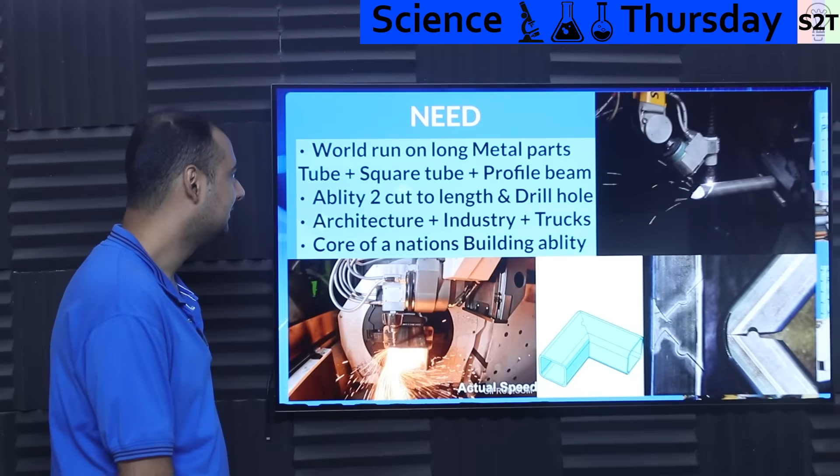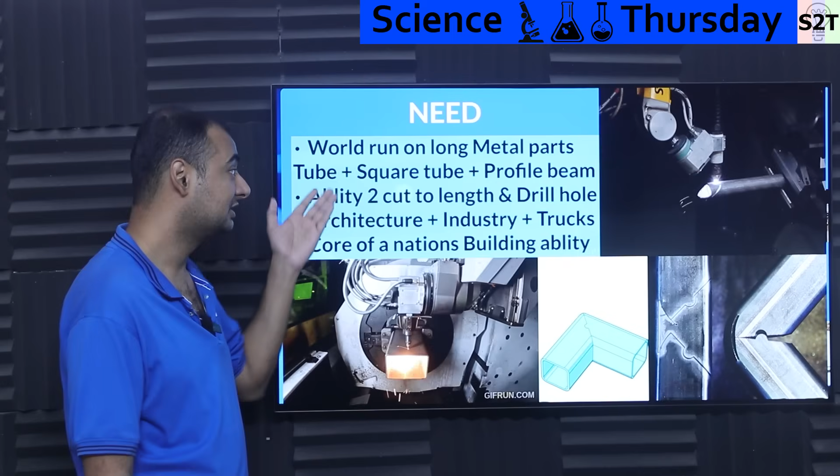First, you have to inherently understand the world runs on metal parts. That's a very basic thing to say, and it's truth. You want to understand the health of a country, figure out how much steel they are making annually. That's how important it is. So be it pipes, tubes, square tubes, profile beams, whatever have you, these things are the backbone of civilization that you and I take for granted, fundamentally.

You might be like, okay, what do we do with these things? These things are stock material. What do you do? Well, you cut them to length. Generally that's the first step. You take a very long one, you cut it to a small one.

Step one, step two, drill holes, a lot of them. For example, if you looked into Edison Motors, or the individual I interviewed about making a hybrid truck in India - trucks are big heavy trucks, I'm not talking pickup trucks, big heavy, basically backbone of the country trucks. They are generally giant metal C-beams and you have a lot of holes into that. So generally you have a long C-beam supply, then you cut them and then you drill them.

Drilling takes a lot of time. So fundamentally, and that's just the trucks part - half of the industrial section is just taking beams and cutting them to the required length, nothing more than that. You'd be shocked, if you have a machine that can do this, how much industrial clients you're gonna get. Just like, hey, we have this material, cut it at this price, go. Oh, of course, have a lot of drilling holes and all that. So like, shut up and take money.

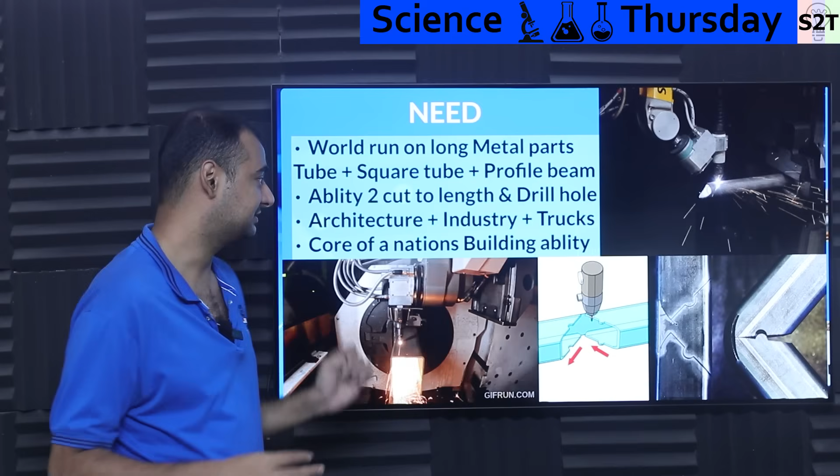So architecture, railings, staircase, way too many things to name. All of the world behind the scenes generally requires something like this, where you have the ability to cut a stock metal material and drill holes into them.

And here's the deal, this is core of a nation building ability. For example, I recently linked a very interesting video from Jerry Rig Everything. He wanted to make a solar roof, so to say, for Speed Week, where they can charge their battery bank and the battery bank will run the administrative assembly vans or something like that. In those sort of scenarios you needed a structure. How would that structure be made? Profile beams - you cut profile beams, you drill profile beams, you go home.

And America is learning that it's an unwise idea to have that sort of machine in China. So they're like, yeah, let's bring everything back to America. And again, he's got a wheelchair factory that literally runs on pipe laser cutting machines. So fundamentally, there are a lot of abilities you unlock if you can do this.

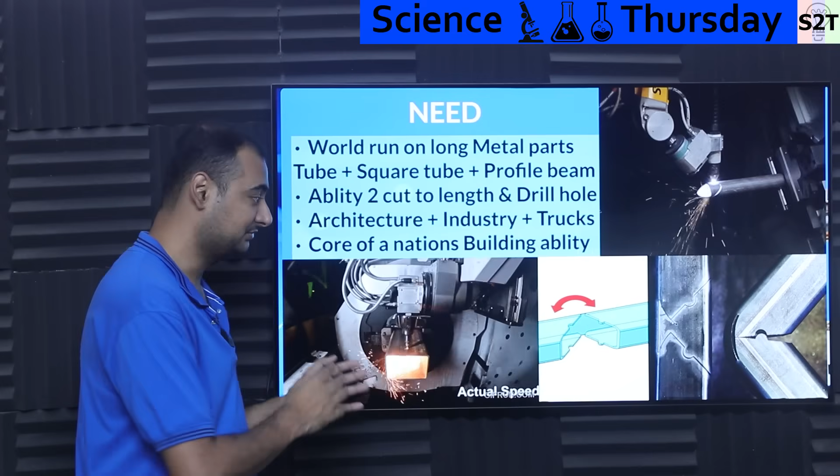Because now, do you need to have this? Yes and no. Can you do what this machine does manually? Of course you can do it manually. But here's the deal, money does not buy time, money only buys speed. For example, how quickly can your factory churn out a truck is directly proportional to how quickly you can do material processing. So if material processing is like 1 hour versus 1 to 5 days - because trust me, drilling on those big C-beams takes sweet time and a lot of sweat, blood and tears - that versus shui, go. So that's like night and day difference.

So fundamentally, it has the ability to build nations. You can do things that you may not think are important, but it's like shut up and take money.

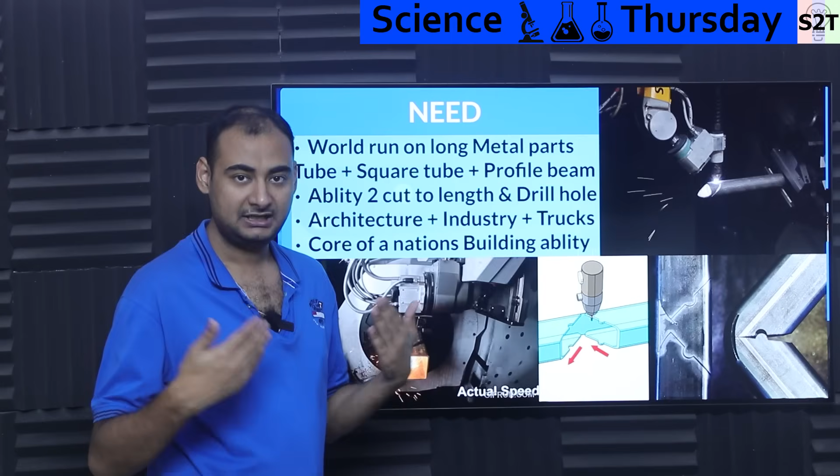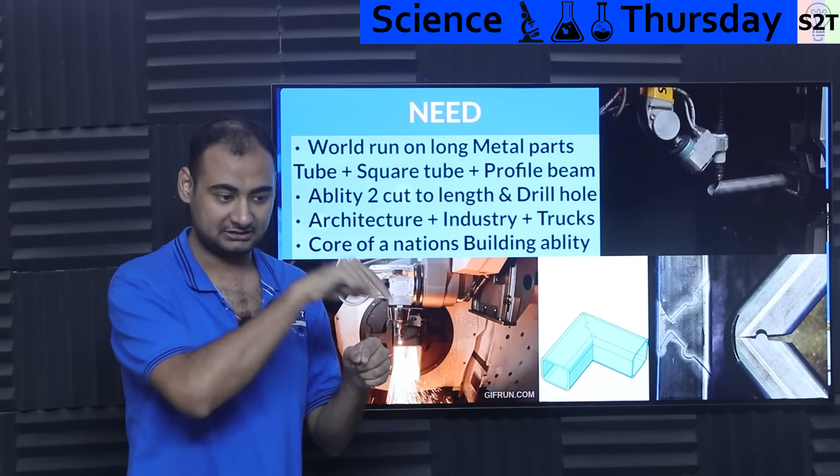For example, let's say you cut a pipe, and you want to give it a 90-degree bend. What do we do generally? We slice those puppies at a 45-degree angle and then you weld it. But again, you have basically two parts and you have to trust the welding is perfect. But here's the deal, if you have laser cutting, you reduce that system. Why? Because you can have a curve and then you have a perfectly fitting piece. So the 90-degree can be maintained far more reliably. Welding, the weld bead area goes down drastically. So trust-wise, you increase the trust while reducing the consumable item, so to say.

There are many things, like if you know what you are doing, you can do amazing things. If you want to make a roll cage, you need to cut a lot of notches. You can do it manually, but good luck. So there is a need for this.

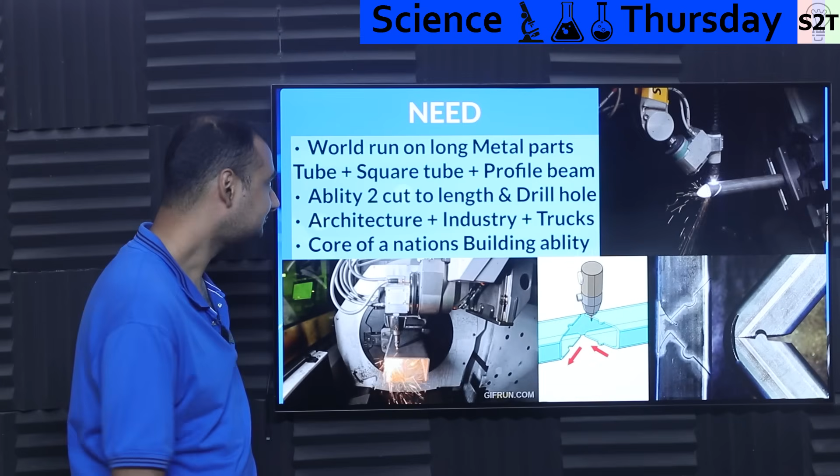This is not a luxury thing, this is like, nah, you need it. So how does this work?

Well, inherently it's just CNC with extra steps. For the cutting element, generally you have two options: laser and plasma. Let this be very clear, plasma you will rarely see, but it is there as an option if you are low on funds.

Plasma is cheap, so then why don't people use it? Plasma gives a very messy edge, so you have to do grinding work after you've cut it. It may be okay, but many times people think, if I'm spending that kind of money and still have to do manual grinding just for cleaning, wouldn't it be better to just pay a little bit extra and go to laser where that step is removed? So plasma is more of a DIY, edge niche case, it makes sense there.

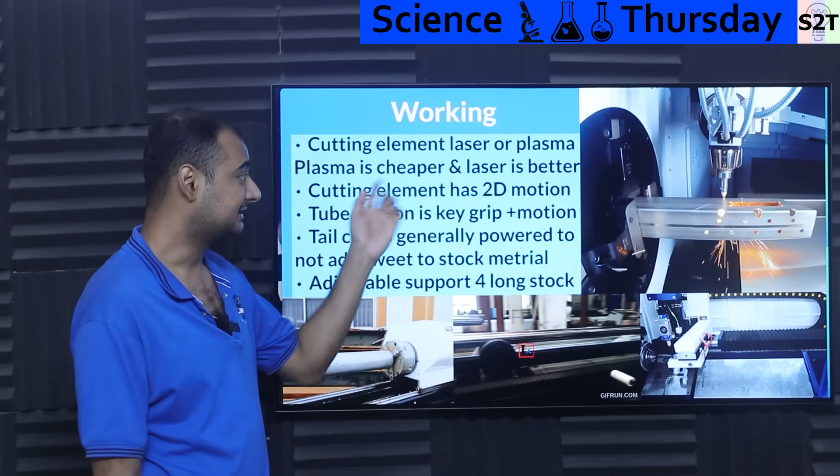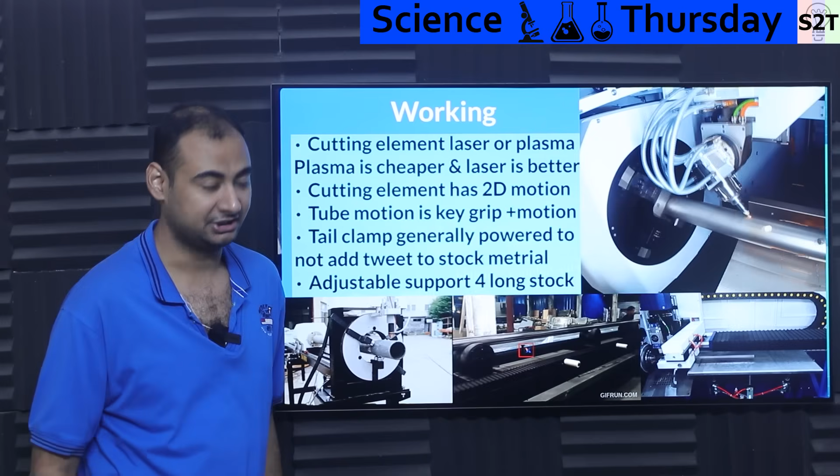Generally you will not get it, but it is an option. Second, most likely, thankfully, development of fiber lasers have made laser a much better option. You can have ludicrously high power ratings now. Gone are the days where it's like 1 kilowatt, whoa. Now you can easily go for 2 kilowatt or 3 kilowatt, meh, who cares? 5 to 6 is like, now we're talking. 20 kilowatt is also available. That's how the cutting element works.

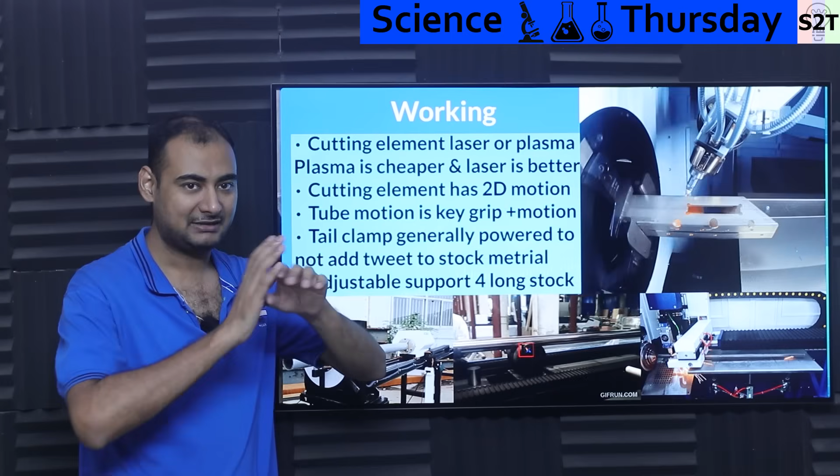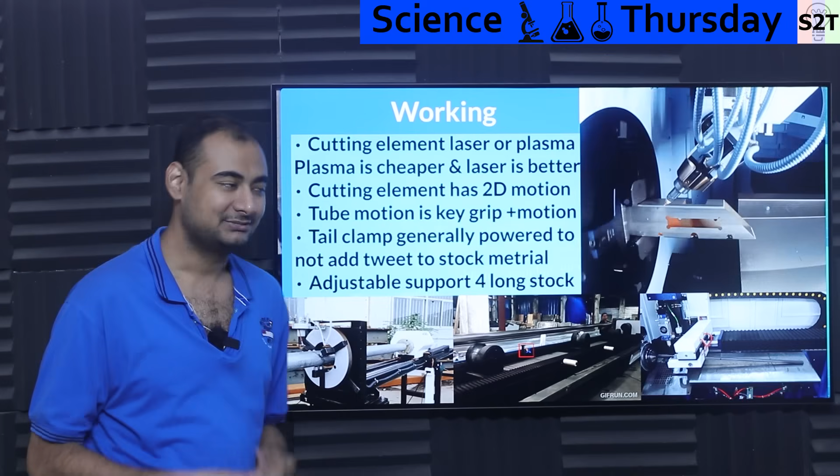Now the cutting element has to move in 2 axes. When you're talking about a pipe, you have to understand it's very well constrained, but again it has an independent profile. It could be circle, square, rectangle, I-beam, H-beam, whatever have you. Some companies were showcasing some weird geometry, and I'm like, why is that geometry even used? But again, it's up to you. You're making a machine, you have to make sure it works with everything.

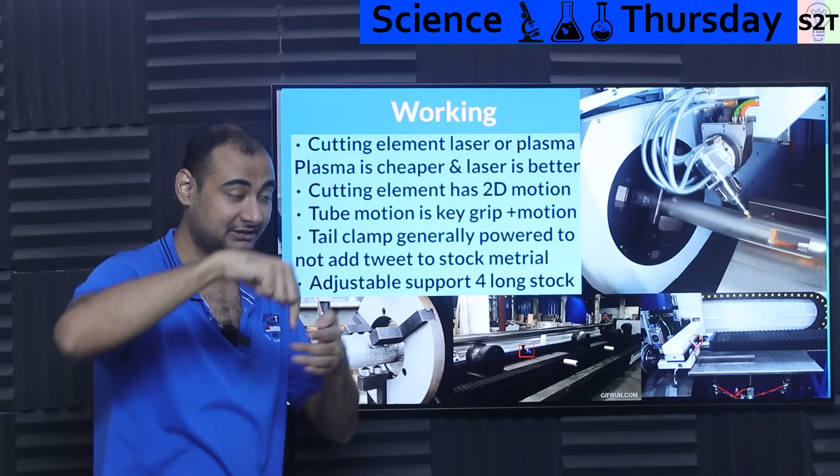So the laser head has to move in 2 axes, not only like this, but also like this. Same technology is utilized in the laser head as normal sheet metal cutting, where you can probe, either inductively probe the surface or physically touch it, or some have an optical system. You have to probe the surface because no matter how accurate the system is, feedstock is never precisely ground. It's a rough material, so you have to compensate for it.

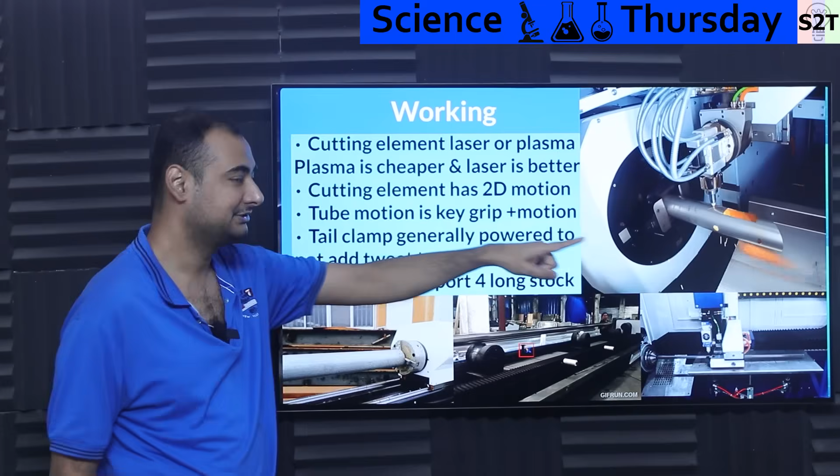So the cutting element gets 2D motion, and then there's the tube motion, how the heck the tube moves. The tube goes way too many back and forth, so tube motion is basically the main critical part. You have to grip it without crushing or damaging it, and still allow motion. That's generally the messy part.

The tail is generally clamped, because when you're talking industrial scale, tubes could be long, like 12 feet or even longer. You can't just pull it, no motor will be like, bruh, I'm out. So generally there's a tail pusher that's doing the heavy lifting, so to say, doing the bulk of the work of physical movement.

Again, if you don't do that, especially on long material, you can add a twist, like how you see long rebars. Take a small section, it's fine. Take a very long section, it's like, ooh. You'll have something similar. If you want to maintain precision, you don't want to add twist or camber to metal pipes. So you have something on the other end that syncs the rotation to the first end.

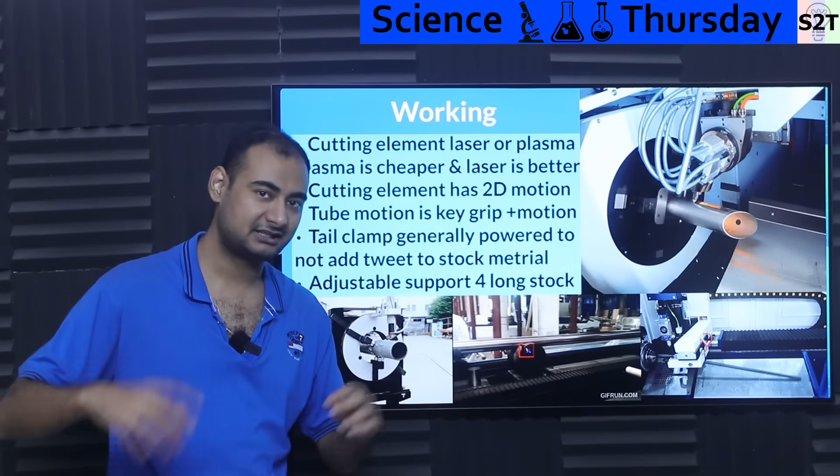Adjustable support is also required, especially for long pipes. If you have a small one like 6 foot, who cares? But if you're dealing with 12 foot, ooh, you need that, otherwise the material will start to camber downwards because of the mass there. So generally these are support systems, and the support has to be designed so it folds out of the way when the tail stock moves there. It's not that black and white, it's complex.

But again, there are some designs I've seen where you pull the material out, though it's very rare. I would not bet money on seeing that. It's very rare to pull the material. I've seen lathe machines that have something like that, but not in laser systems.

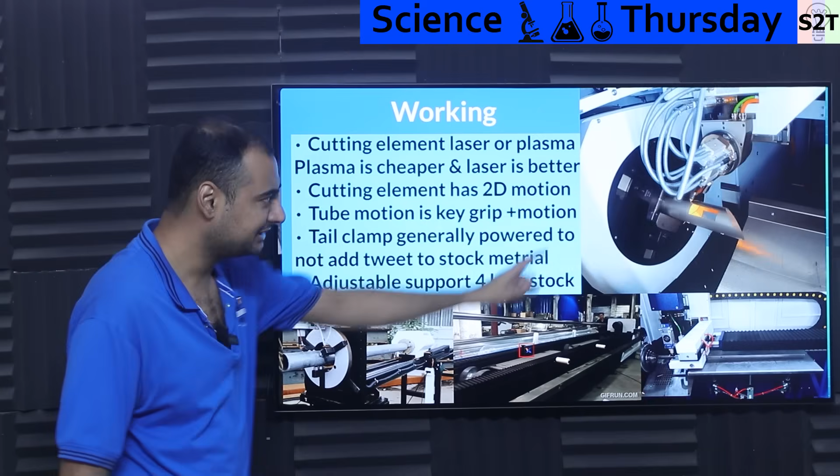But somebody, I think, copy pasted that design here. In most scenarios, you generally have a tailstock that is doing the pushing and pulling.

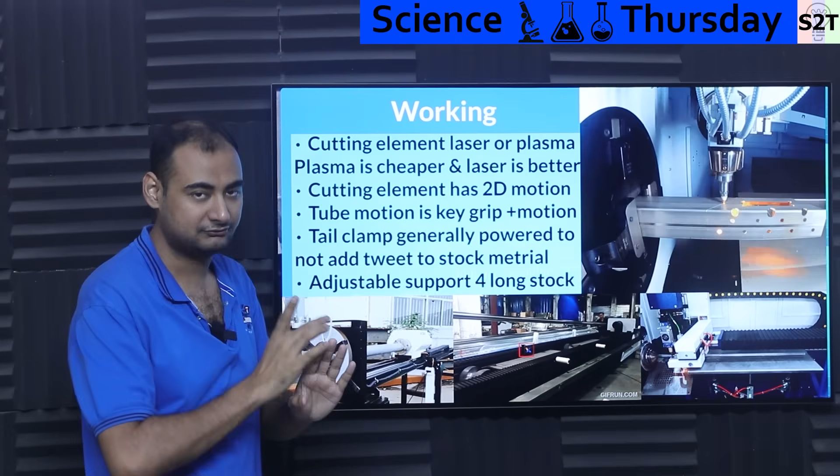So that's the working. Basically your laser moves in 2 axes minimum, and then you have this rotation mechanism that allows fully free movement, achieved by the tailstock. The tailstock is also rotating in sync. And you need support depending on the length, most of the time you do need it, especially if you are working with thin wall material.

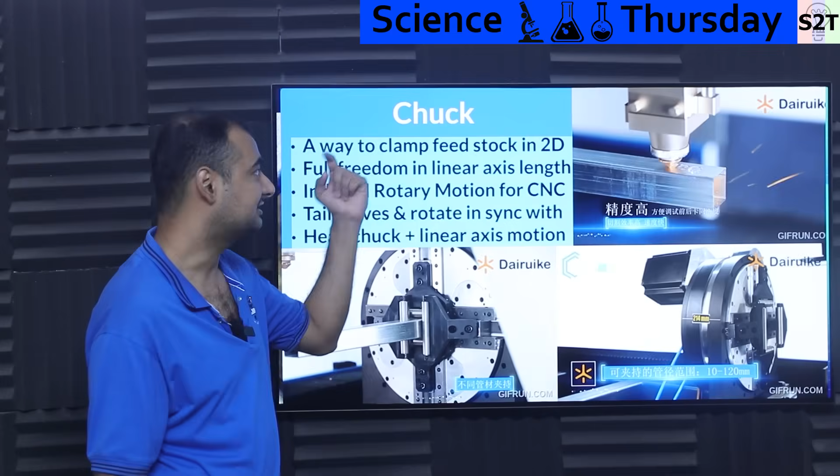Now here's the deal. Fundamentally, we are not talking about something more complex than a CNC machine, but the core essence is the chuck, this puppy. Basically, where your money goes, this puppy consumes your money.

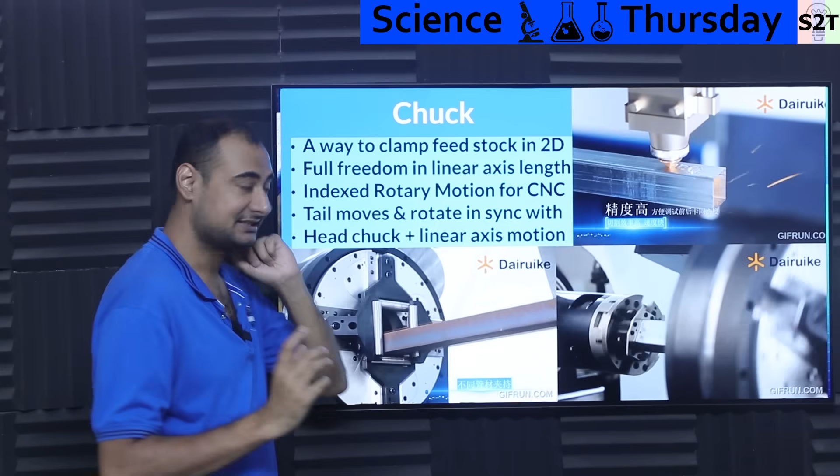So the chuck is the way, think about it, it has to clamp the material in 2 axes. Basically it cannot go left to right or top to bottom. So it's like, I lock you here, you are locked here. And it has to maintain freedom in 1 axis. So lock in 2 axes and have full freedom in 1 axis.

That's why you generally see rollers. It has to be rollers. Otherwise, how are you going to move it back and forth? So that's there, and it's fully indexed.

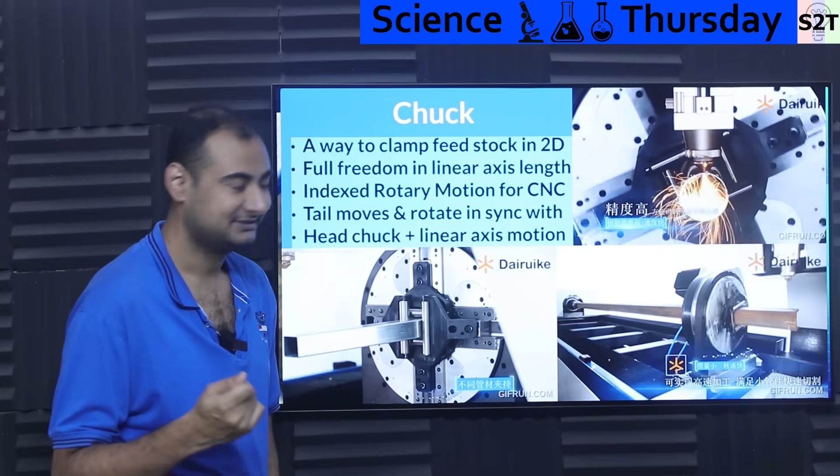Meaning the rotation of this is not just like it spins with a motor. It's not that. It has to be like, okay, 15 degree plus, minus 20 degree, plus 20 degree, plus 7 degree. It has to be like that. So it's indexed, and I do not mean incremental encoder. It's like a fully absolute encoder is utilized, so you know how it's moving and spinning.

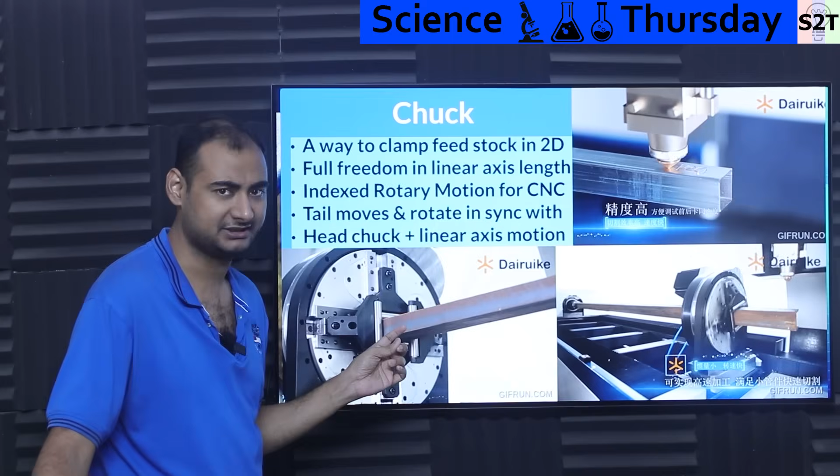So it's a difficult task, let's just be very clear. It's a very difficult, very finicky thing, and the tailstock has to sync up with it. For example, if this puppy is going YOLO, the tailstock also has to go YOLO, in sync, it has to be perfectly in sync. Otherwise it will end up twisting.

So fundamentally doing that, and syncing. Now thankfully we have developed servo motors, and servo motors have encoders. So nowadays syncing 2 rotating parts, even though they could be very far apart, like 12 feet or 30 feet, is not a big deal nowadays.

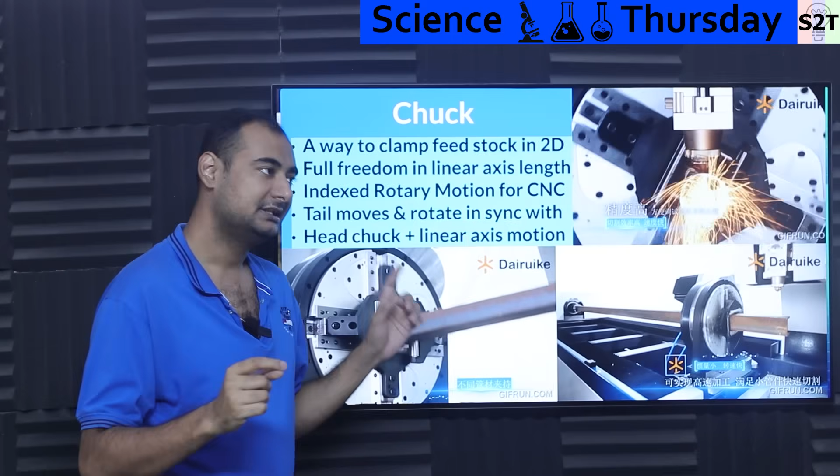It can be done. Now the chuck is the main tricky part, with how you clamp it. Well, if you have a very simple system, a very cheap system only designed for round tube or square feedstock, they could have linear motion where it just clamps in all axes at the same time. Not recommended, because you can't clamp rectangular things.

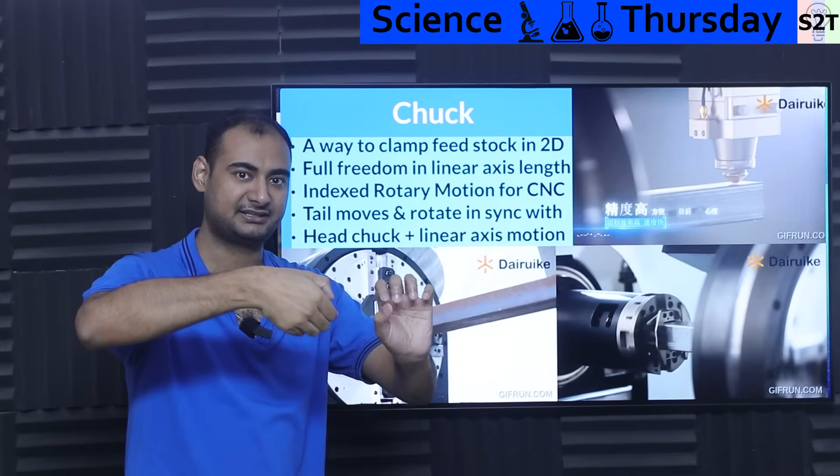So I will link a video down below where an individual builds an iris kind of structure that clamps onto a round stock. Round stock, awesome. Not suitable for rectangular stock. So for rectangular stock, you generally have two axes.

And if you want to see this axis in motion, look into your printer. Most printers have a paper tray. In this paper tray, you will find clamps that are on the side. But if you move one clamp, the other clamp moves automatically. So that same mechanism is used.

It's what we call a self-centering chuck. So you generally have a pneumatic tube pushing the chuck, and because generally we are dealing with metal, the moment you clamp, you get some resistance, the clamp stops there. And that's how you have two independent axes.

So it automatically fits itself. Or if you want to save money, instead of getting pneumatic, you can have a manual system where every time you have to do that, you do that. Again, only recommended for low throughput systems, but if it's a high throughput machine, it won't be manual, it will be automated. But you can do quite amazing things nowadays.

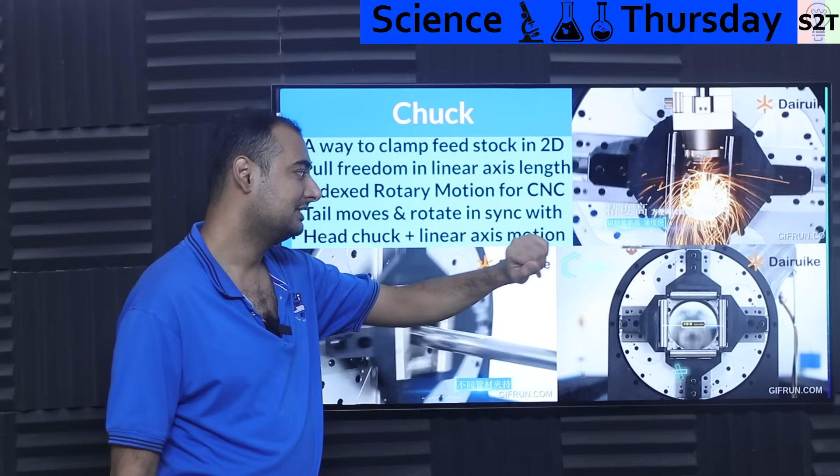So generally this will spin like there is no tomorrow if all you are doing is taking a long stock material and cutting it into small sections. Then that spinning material will be as fast as your laser. So if your laser is like, I got this, the motor would be like, I got this too. So the motor could spin almost 100 RPM. Generally not done, but it can be done if your laser is able to keep up.

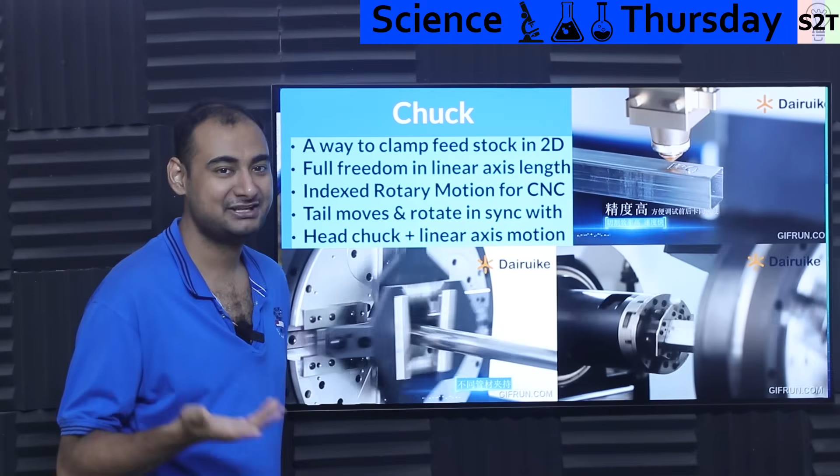So that's the chuck part. Most of the engineering goes into the chuck, basically making it stable, making it reliable, making it trustworthy. And you can build it yourself also. I have linked a video down below.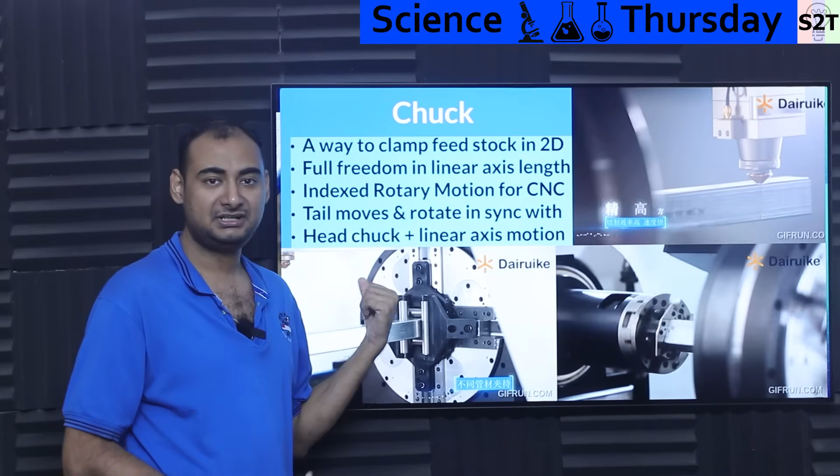So let's understand the machine part of it, the pro part. Basically, if you want to buy it, these are expensive. Let that be very clear. If you look into sheet metal laser cutting, multiply the price by 3 or 4, then you'll get that. Now, wait a minute, is it really that expensive? No, its demand is less. Not even demand is less, people want it. It's just that supply and demand has not balanced up perfectly, so it's very expensive compared to the CNC system.

So many companies will give you, you have this laser CNC, you can have an add-on of pipe cutter. Exact same thing that basically Jerry Rig is doing for its wheelchair factory, because again, the hardware is the same. As long as you can figure out the chuck mechanism, everything else, shut up, take money, it's easy.

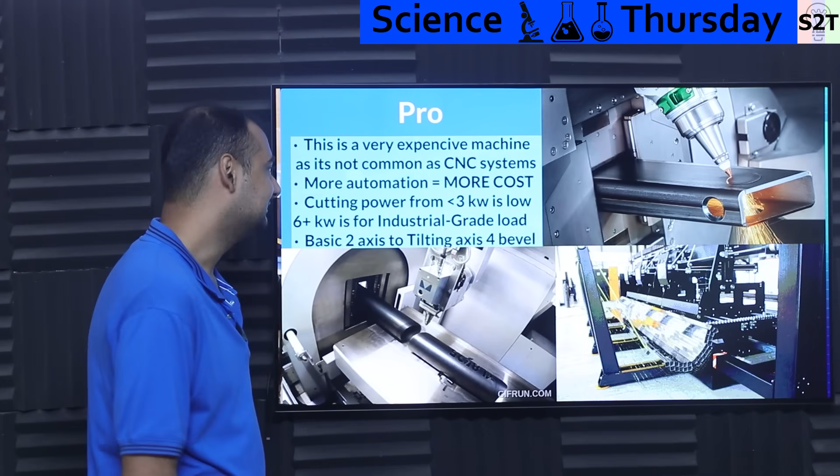So that is there. Now, more automation you want on these, the more expensive they will be. Meaning if you want, hey, I have just this material coming in and then the final processed part goes out the other end, yeah, it will be expensive. For example, you may not think about it, but what happens to the material once you cut it? What mechanism do you have to handle it?

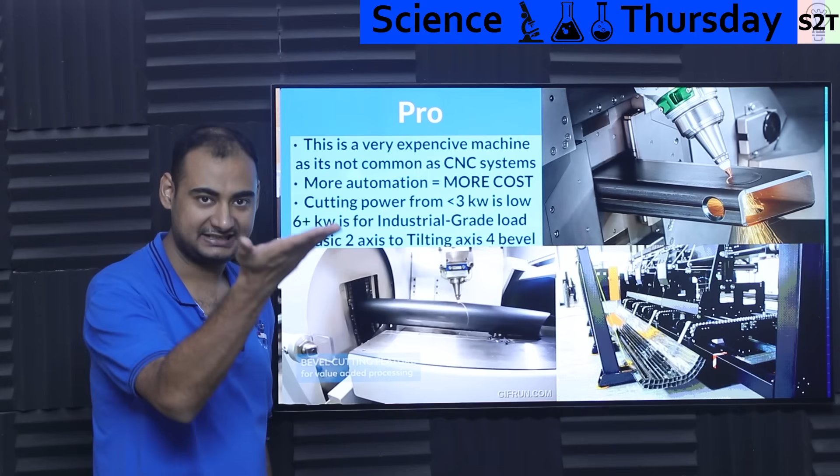Well, for example, this, you see this tray is automated. It actually pulls it out, pulls it away. So based on the material you are dealing with, based on how much human intervention you want there, some designs would be like, you do not touch it. The person drops the material in one slot, like almost like with a forklift, and you go home, like done. The final part would be literally final part. So in those sort of scenarios, you have to spend a lot of money in automation.

Now, is it worth to spend that much? Well, it depends on what is the human labor cost. And most companies are realizing that it's better to have automation than to have human labor, simply because running cost piles up. These machines are expensive, but again, they are industrial equipment. They can easily last 10 years, easily. And their ROI could be as quick as 3 to 4 years. So most people are like, yeah, just pay that extra thing.

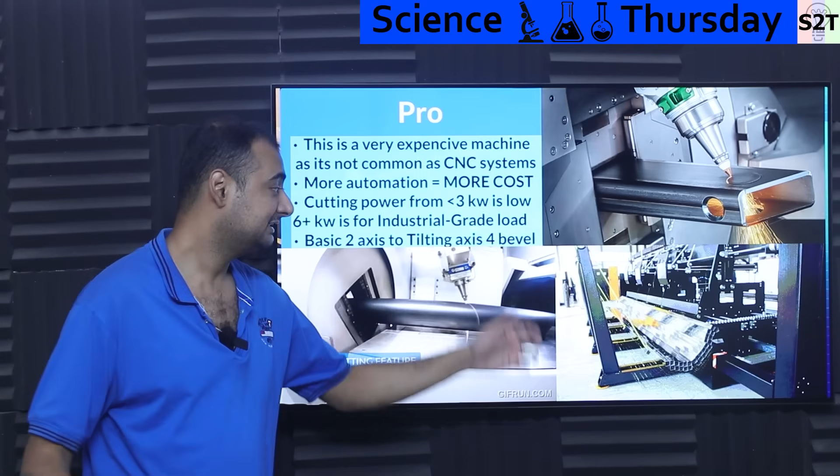And again, that creates a compound error where it's like, okay, now machines are expensive. So people are like, why not add a little bit more money? Why not add this automation? The overall cost becomes even more crazy. So capital wise, this is an expensive puppy. And again, they are huge also. Let that be very clear. In terms of land footprint, how much you need, this thing will make every other machine look small.

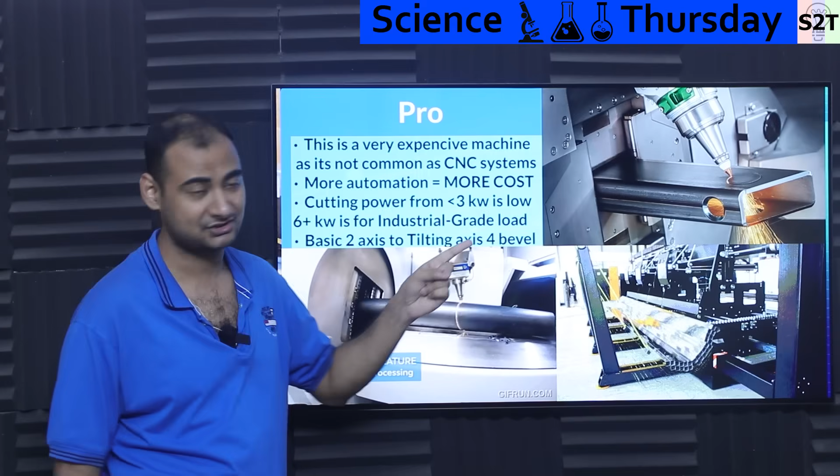Like these are huge machines. And God help you if you're dealing industrial scale materials. So fundamentally, these are huge. So the more automation you want, the more costly they will be. And cutting power generally comes in two core categories. You have less than 3 kilowatt. They are generally classified as mid-range to mild power. And then you have god tier power, 6 kilowatt or above.

That's industrial grade. Basically, at that point in time, you're processing material. It's like, okay, 20-foot container or 40-foot container is coming in, all the raw material is coming out, go. So that is at that level. Now, basic 2-axis cutting that you see, it's not that expensive. You can get it done without too much hassle. That Jerry Rig one is the basic one.

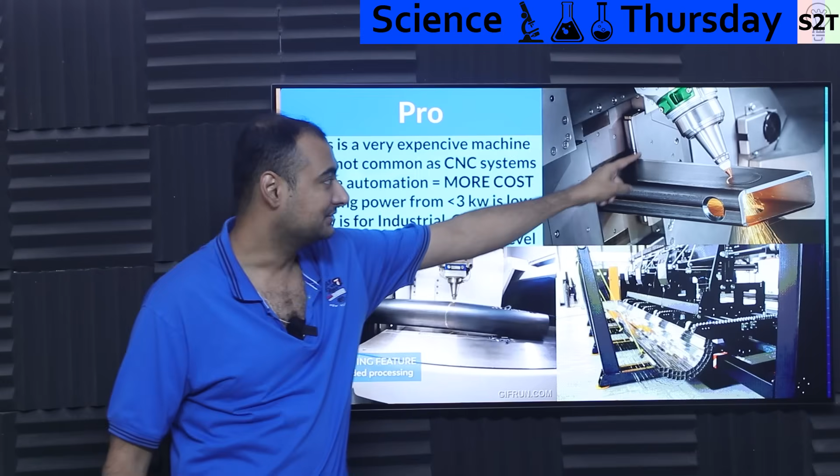Like, what is the complex one? Complex is bevel cut. Now, do you need bevel cut? If you're welding, yes. That's like shortcut technique. Same way people do not want to deal with plasma because you have to do grinding stage. Bevel takes up one step above. Basically, you never want to weld metals like this, like you do not want, that's not what you want. You generally want a groove here and a bevel here, so you can have weld puddle there, properly reliable. So imagine the material cutting itself gives you that.

So if you can rotate the laser, you will get that bevel cut angle. But again, it does add one extra axis, and again, computer software also has to become complicated. But again, we are not in 1990. That's like, shut up, take money. It's like, bro, even Raspberry Pi is like, I can do this in my sleep. So figuring out that angle from tool path, that's easy. But welding, like imagine you have to weld a pipe there. Super easy. You just put it there, done, go.

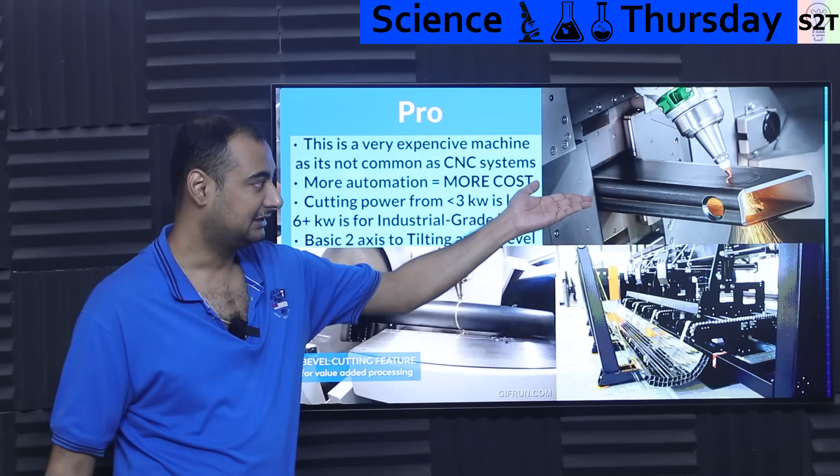So fundamentally, the moment you add that axis, it becomes what we call add-on. But again, they are expensive. But if you have to do welding, people will be like, shut up, take money. It does not make sense to not buy that. If you have to do welding, having the ability to get the precise angle on the cutting floor, shut up, take money. But they are expensive. Let that be very clear. It is expensive having this whole system. It is expensive.

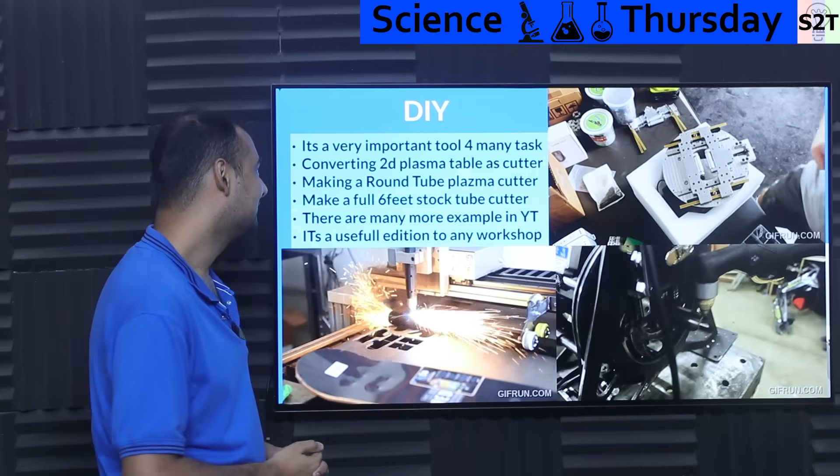Now, what about do it yourself? Well, thankfully, because it's a very important tool for many tasks, even a small workshop, there are more than enough scenarios where a small workshop would really love to have this. So in those scenarios, some people have come up with clever ideas. My personal favorite is this one.

Many places have what we call plasma tables, basically a CNC machine with a plasma cutter, but it's a 2D machine. So they were like, what if we have a pipe there and let it roll and it just rotates? They did it. It's very clever, one of the most clever things.

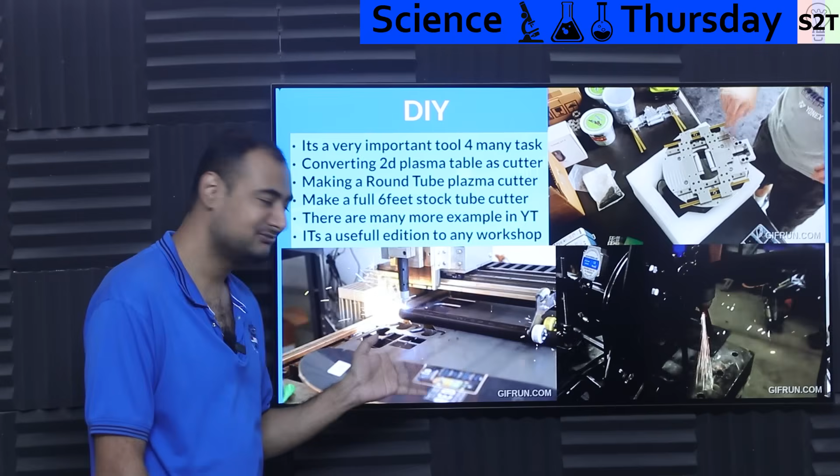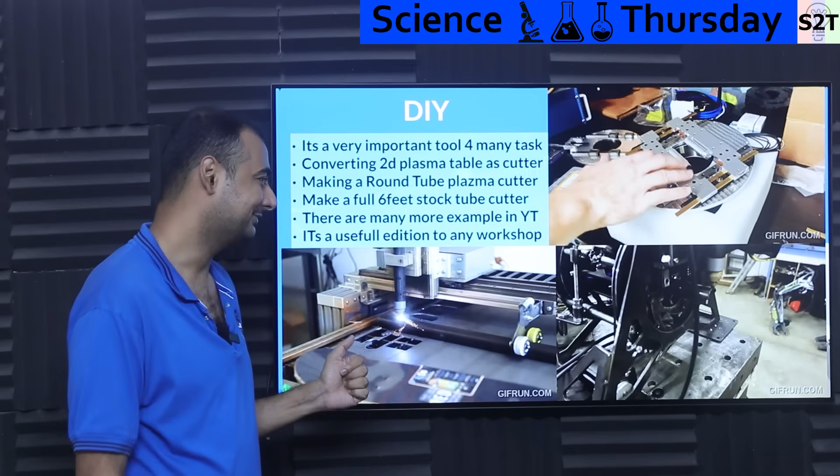But your length would be limited, and how reliable it would be is limited. But if you're not dealing with very long stock, this is surprisingly clever, and you can make bicycles out of it in mass, or do roll cages in mass with this sort of thing. So you convert your plasma table into this, link to video down below.

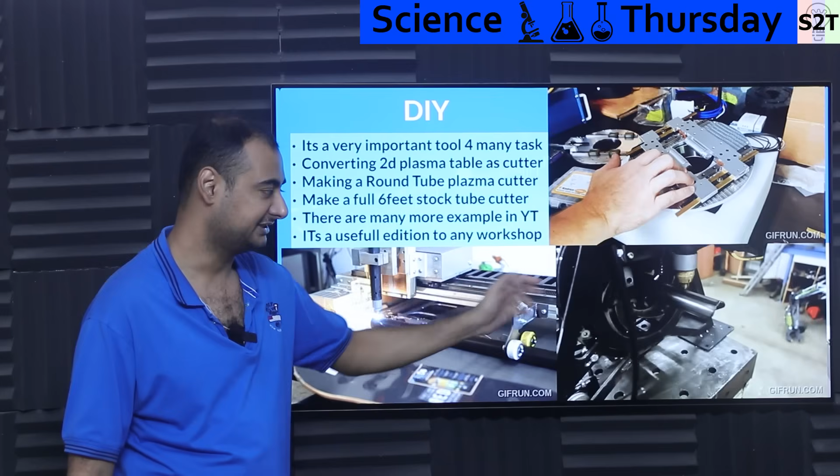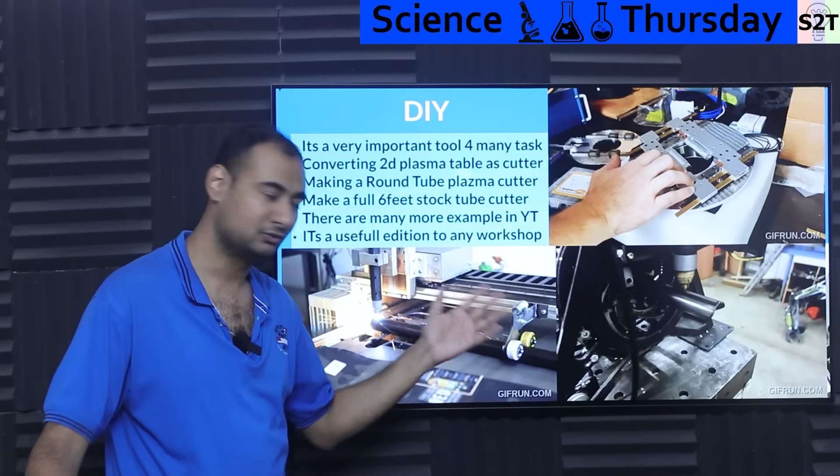And then there's somebody who was dealing with roll cages, and he was like, what if I make it directly? This machine is kind of independent rather than a big machine. It's just like, okay, this is the material, it pulls the pipes, assuming the pipes are not very long. But more than good enough for what he's doing, and it's using plasma.

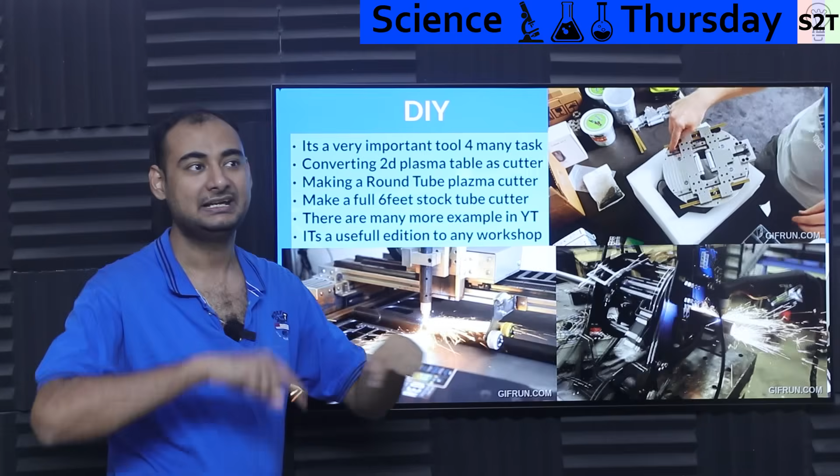These two are plasma systems. The system does have open wiring, so wiring-wise it's questionable, but again, cheap and good, gets the job done, shut up, take my money. For many college projects, it would actually be better to make this machine, then start to work on the roll cage.

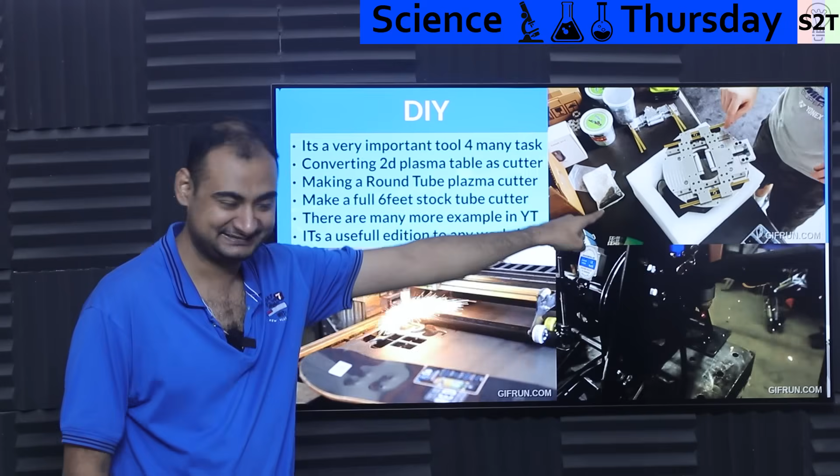And then there's this guy. I have no idea what's wrong with his brain, but he was like, what if I make the whole machine? And yes, he actually machined that damn thing. The chuck is made by him, not bought. He made it, and he made the full system, not some jugaad management, but the full thing - the whole machine with a tailstock, a rotating system, a whole chuck system.

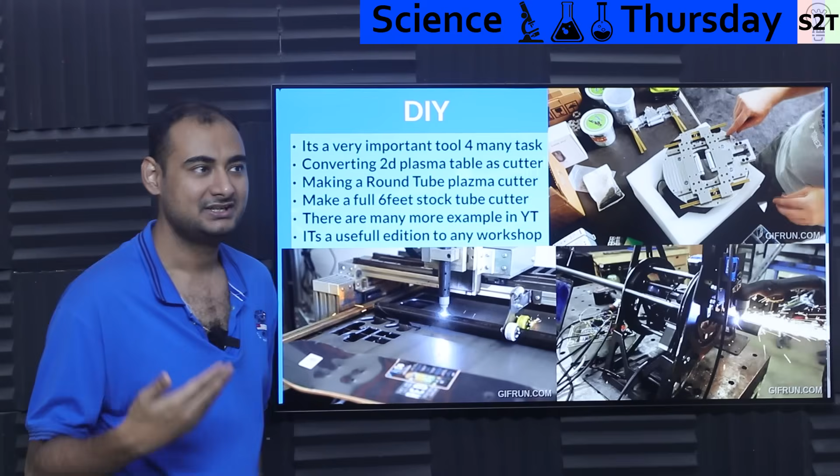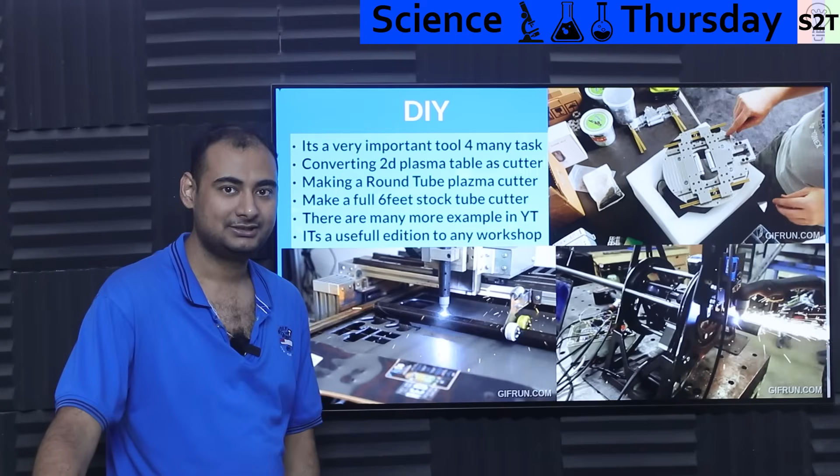And the idea was very clever: if you're buying for civilian use, 6 foot is the stock material, because generally 6 foot is super easy to ship. If you want longer material, of course you can get it, it's just that shipping will be ludicrously expensive. So they were like, what if I make a machine made for that home use scenario? And of course, he's not building a Tony Stark arc reactor making fiber lasers, but you can buy fiber lasers nowadays quite cheaply, surprisingly, in contrast to other things.

But he's like, what if I make everything else? This is good. This is horrifying, but this is good. It can be done. So it's a very useful addition to most metal working shops, let that be very clear. In most scenarios, it's like, shut up, do this.

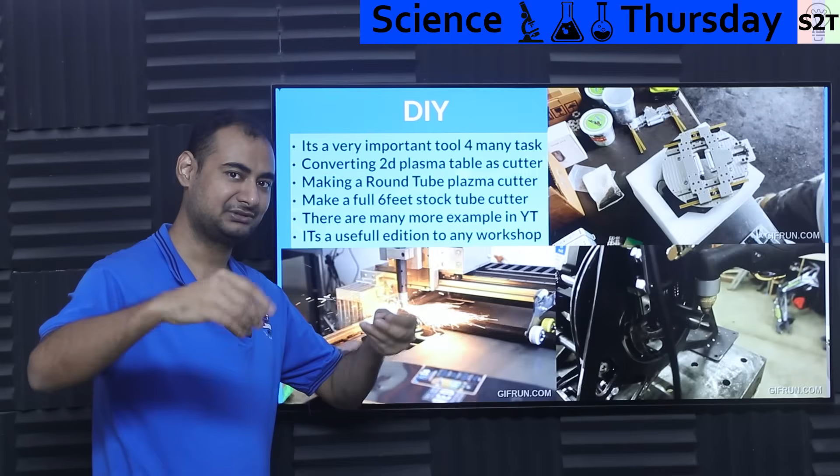Most scenarios are like, shut up, do this. And if you already have the materials for laser, some people have figured out how to have this as an add-on to their pre-existing laser system. Like how you have a laser cutter and you can have a spin axis, similar thing. So it's a really clever utilization.

This one is super fine-tuned for one task, super awesome. This management is just like reutilizing your plasma table for more. And this guy went all out. It's like, hey, if you're running a college or university, just have a few people working together and ta-da, we have this tool. Oh, current project includes making a 3D metal printer.

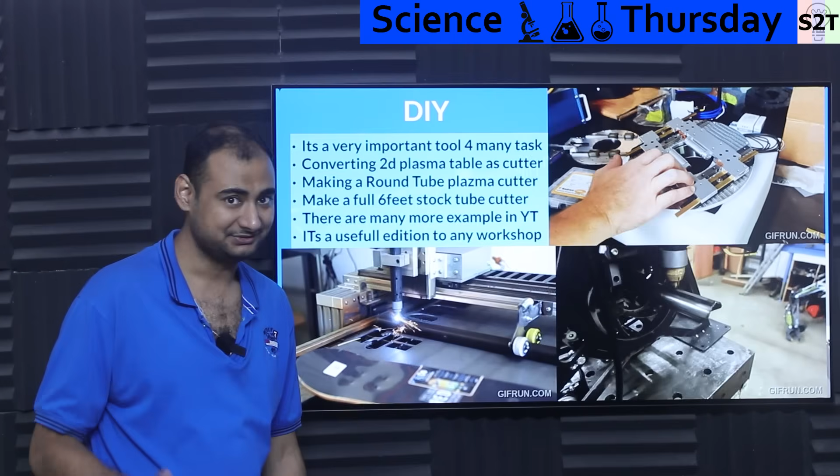So there are a lot of DIY options, let that be very clear. Never let someone stop you from trying to do this. You can do it. Even some of them sell you plans. So it's not that difficult.

So this was my presentation on basically metal pipe, laser pipe cutting tools, hopefully. And I hope you liked it and learned from it.